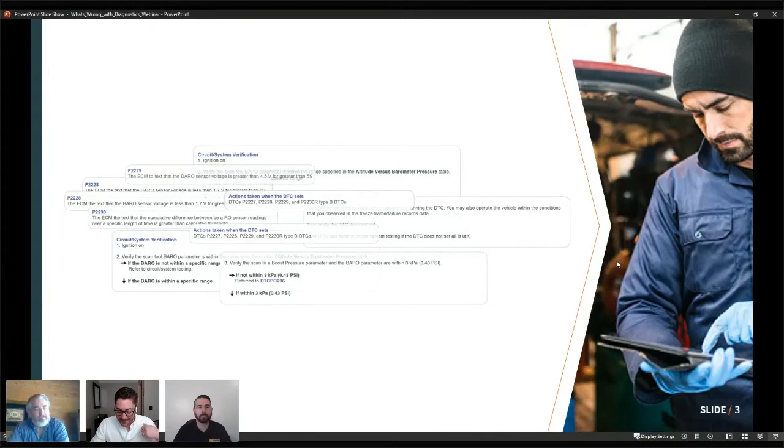Before we dig deep into that, let's delve into how traditional diagnostics have kind of failed you guys in the past. We'll start off with Mike. Do you have any feedback on how traditional diagnostics have failed you in the past?

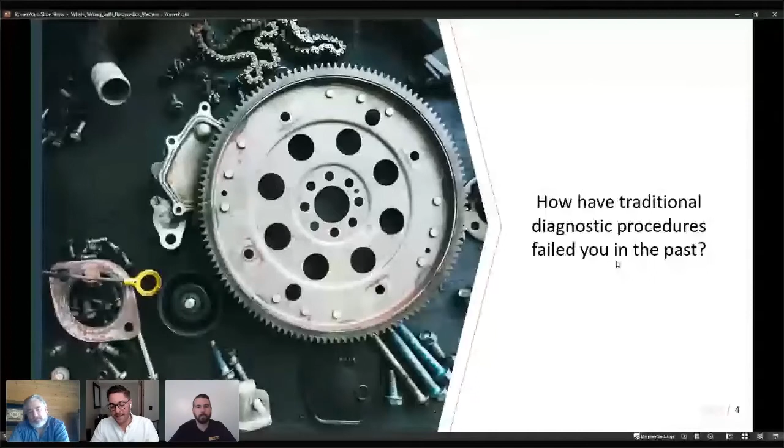Any stories? Yeah, so that's a great question. Traditional diagnostics, when we look at that, it's a terrible term, right? So traditional diagnostics would be the patterns and the processes that we would use 10 years ago to fix an early fuel injection car. And now these vehicles are pretty much driving themselves.

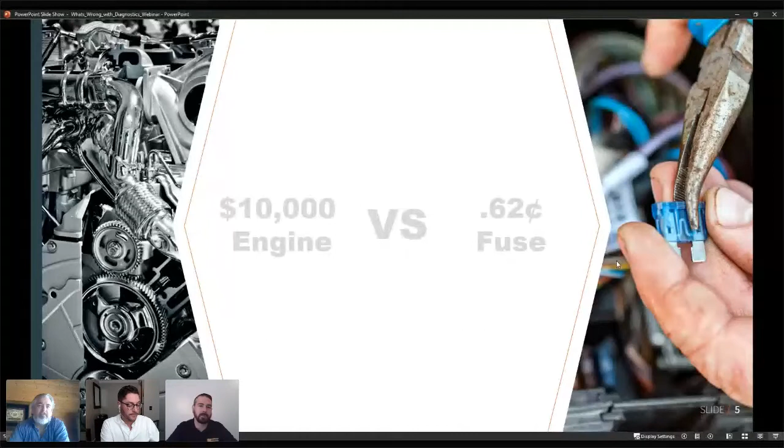The processes for, we look at an ignition switch used to be just a power, and that powered the vehicle on. And now these vehicles are sending communication signals to turn on modules. We have technicians that don't understand how to test the old ignition switch. And these new systems have already been out, they're already on the road, and they're coming into the shops.

So we're so far behind, it's challenging to see how we ever catch up. And the downside of that is you give a technician a trouble tree diagnostic, and half the time that we go through those processes, something's going to be wrong. That trouble tree is just not going to catch it, because the trouble tree wasn't written for a vehicle that's been on the road for 5 or 10 years.

So technicians are intimidated by that. They know that they're not going to be successful that way. And then they're also intimidated by the diagnostics themselves.

I recently heard a story, this wasn't one of my vehicles, but it was a high-end Euro car that a shop had. They couldn't get the engine started and thought the motor was locked up. They ended up putting a motor in this car, which could have probably easily been a $10,000 job. And all that was wrong with it was a fuse that was blown.

That's a standard in our industry right now. As technicians, I have a jar of fuses that I keep in all of our trucks. And when that jar gets full enough to fill a pickle jar, we're going to do some sort of raffle to point out the fact that technicians can't diagnose fuses half the time. They don't understand electrical theory. And that's a huge issue in our industry right now.

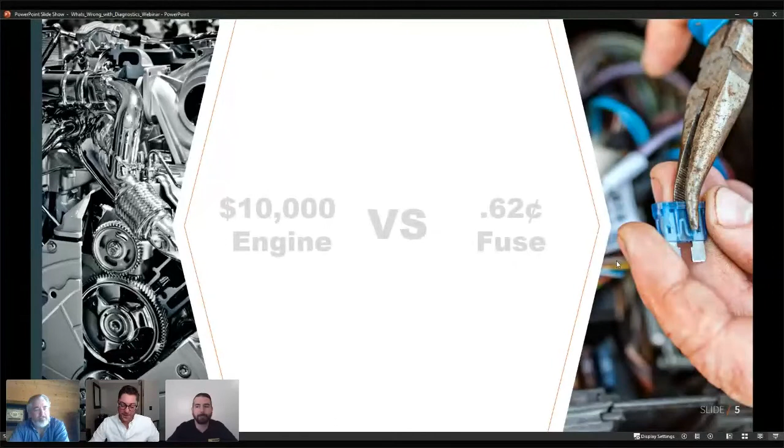Yeah, that's a great question, Nick. So my history going back to OBD1 and seeing the evolution of diagnostics gives me a unique perspective, because one of the jobs I had was authoring service manuals and interacting with the engineering community. And it was amazing to me to see an electrical or mechanical engineer who was kind of surprised he was asked to support authoring diagnostics for the field.

At that time, those engineers were responsible for the warranty on their component. So the story I have is I was witness to an engineer writing the FMEA diagnostics, the failure effects mode analysis, for his specific PCM, a powertrain control module, back in the early 90s, where he wrote 47 pages of pinpoint tests and trouble trees to rule out every other possible cause before he would lead the technician to replace the unit.

He thought that was the best way to control his warranty. In the end, technicians got paid to follow that very lengthy stream, and it may not have been the right thing for his warranty dollars. It definitely was not the right thing for the technician. So that's where I saw things go awry, people trying to protect their component and rule out everything else, rather than doing a good diagnostic of what happens.

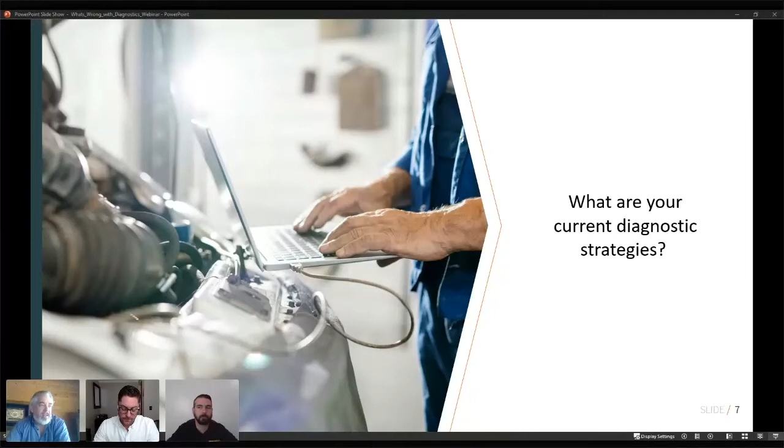You only get one chance to make a first impression, they say, in life, and that's true with customers as well. Once you attempt to repair a vehicle, you've kind of said to the customer, yes, you've got a valid complaint. And if you don't know how it's supposed to work, that can be a real challenge.

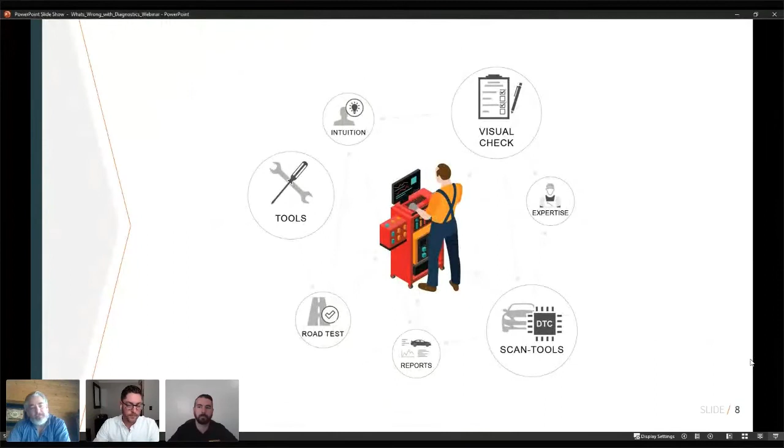That makes perfect sense. And when it comes to that lack of evolution, I always go right to thinking about multi-problem scenarios. Because oftentimes you get a vehicle - or it doesn't have to be a vehicle, this could be anything, even a CNC machine for all we know - with multiple trouble codes and or multiple symptoms. You could go through traditional diagnostic procedures, but it's just very myopic, one by one. So if you don't have the experience to understand and know that these things are interconnected in some way, then you're kind of left on your own, right?

Yeah, absolutely, very true. I use the example - you look at these systems and how everything's integrated. And the big thing that we do a lot of is ADAS systems.

So if the adaptive cruise control doesn't work, that's what the customer is going to bring it in for. We saw one not too long ago where the adaptive cruise control light was obviously on the dash, but it was because of a traction control system issue. We see a lot of glass companies or collision sublet companies that don't know diagnostics run into calibrating these systems - they set everything up, try to calibrate and push the button, and it's not going to work. And it's not going to work not because there's an issue with that radar.

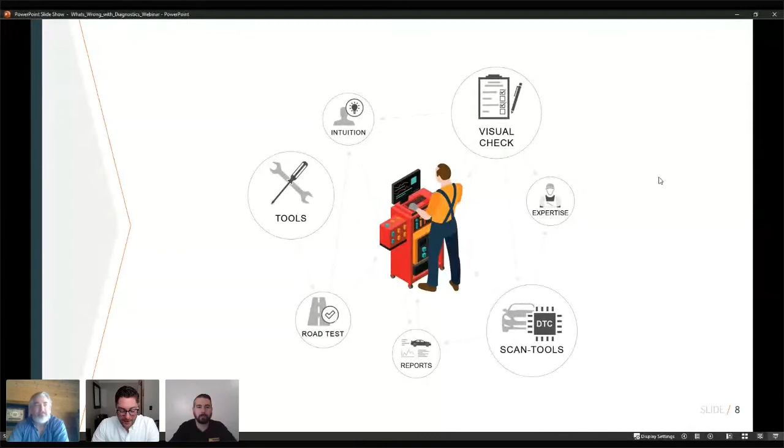That's an interesting one, I'm glad you brought that one up, Mike. So let's move along to our next question here, and we could probably talk for an entire hour just on this. So what are the biggest challenges facing today's technicians?

Well, obviously it's a lack of technicians, and it's a lack of drive for technicians to want to become successful. On the training side, we do a lot of technician training, and we focus on the aftermarket. And I look a lot at how can I be a better leader to these technicians, how can I set a good example of this is where you want to be as a technician.

But generally speaking, when you're working in a repair shop, if you are the diagnostic tech in the standard flat rate system, which still represents most of the industry, you're not going to make as much money as the guy who's doing brake jobs for 3 hours pop, and he's knocking them out in 45 minutes.

And that is slowly starting to change, but unfortunately diagnostics shops have not found a way to make it profitable. I've got 2 GM no-start vehicles for 2 independent repair shops on my schedule this week. I actually had to scramble to fit them in because they're probably going to be easy jobs. And it's sad because these shops don't have technicians that want to learn this stuff, and they don't know how to push those technicians to want to learn it.

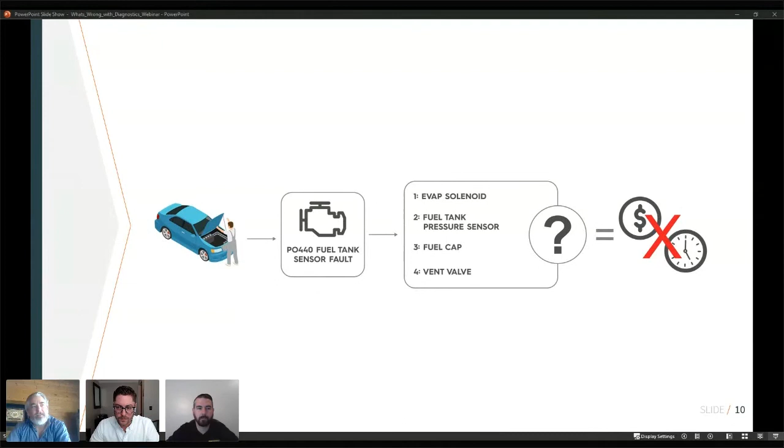Right, all those specific diagnostics — even with right to repair, an independent shop like Mike's doesn't get the benefit of the OEM data because they don't license everything needed in the aftermarket. They're only required to provide information on so much, and they see it as a way to keep the market going to the dealership. There's a reason independent shops are so successful: the delivery, the customer focus, and the pricing differential from going to the dealer.

Mm-hmm. Oh, that makes perfect sense.

Going back to the technician shortage — we had a cultural shift years ago where the focus was really on getting a 4-year degree from a university and getting a desk job. And while all that was occurring, products kept getting more and more complex, and technicians' jobs became harder and harder.

I was just talking to a friend of mine I used to work with, and back in the day, he would have probably 90% of his time actually on a vehicle, hands-on. Today, 90% of that time is spent behind a computer using diagnostic software. So it's just been a huge shift.

I don't think there's a good understanding out there that being a technician, whether automotive or otherwise, can yield an excellent income and some really solid challenges to go through on a daily basis.

So, yeah, Mike, you've been in it a long time. Can you speak to how different it is today than it was 10 years ago to be a tech? Actually, yeah.

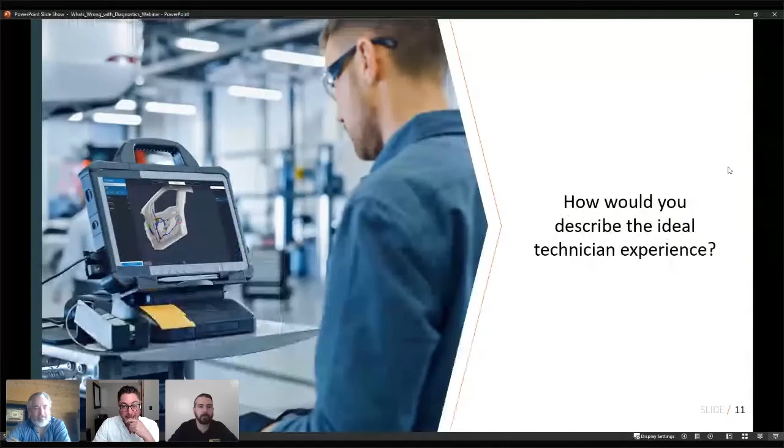So let's move on to our next subject here. Another really loaded question, and I'd like to spend a little bit of time on this one, just kind of playing catch with it. How would you describe the ideal technician experience? Mike, let's start with you.

So actually, if I can answer that, if you go back a couple slides we could touch on that P0440 code, and that'll hopefully help paint the picture. As technicians, to be honest, I don't see as many emissions faults anymore. But as a technician, we get a vehicle pulled into the shop with a P0440 code. What that code means is what it means. I believe 440 isn't necessarily a fuel tank sensor fault, but a general evap fault, meaning there's an issue in the evap system.

It's the first code that sets. Our issue for that vehicle may be a fuel tank sensor fault, but the diagnostic trouble tree, the official trouble tree, is going to take us through testing the evap solenoid, the fuel cap, the fuel tank pressure sensor, and the purge valve. So we go through all of these steps to get through the process, and a lot of that involves smoke testing, which is pretty time-consuming, plus a lot of other checks—getting the vehicle up in the air, putting it down, putting it up, putting it down, looking for smoke.

And then some electrical testing as well. And what some of the aftermarket companies have come through, you look at Identifix and the Snap-on platform with SureTrack, and all their repair link info.

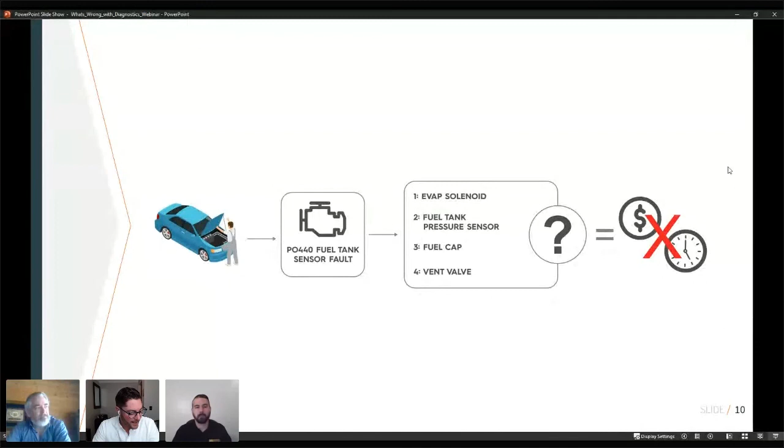And I really like the fact that you use these different tools to lead you to a test and not just a component replacement. Because I know a lot of folks personally will use those types of things, get the highest rated solution based on the problem they plugged in, and just go ahead and replace that component. Yep. So I like that you're using it to lead you to a test and not just a component replacement, so you can actually get a proper diagnosis.

Well, and quite frankly, probably 60 to 75% of the time that works. If you look at the percentages, a lot of these systems, Identifix will almost show you, not in percentage, but it'll show 500 people replace the purge valve, or 1,000 people replace fuel pressure sensor. So you're looking at percentages, and that's probably pretty accurate. But what that does is, for a lot of technicians, why bother doing the testing? Why not take a gamble? 500 people put a purge valve in it, let's give it a shot.

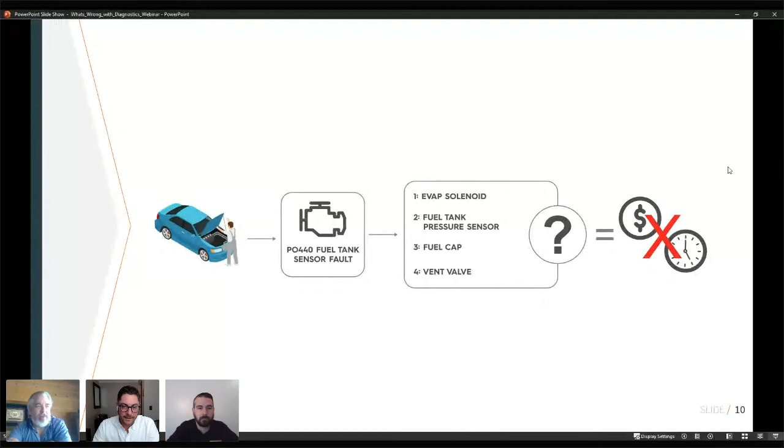They're playing the odds, unfortunately. And how dangerous is that, Ralph, to play the odds like that? Oh, extremely. To Mike's point earlier, you call the customer, you tell them this is what it's going to be. Because you don't have the part in stock, you have to go get it, you put it on, and then you find out you're wrong.

So what's really missing today is taking the old process, since I'm the old guy. I trained six different entry-level technicians when I was a master, and over time imparted my knowledge to them, in the shop, order by order. Today, with the pandemic and even just with mobile repair, what support does an entry-level or newer technician have when he can't go to the stall next to him and ask his colleague or his mentor what he should do with this problem?

So the guided diagnostic solutions coming out really replace the mentorship and have become the force multiplier. Not just like Identifix does today, giving a percentage that you guess, but providing the steps you should do in the proper order. It's machine learning, AI, it learns from past repairs. You get the benefit of what other people have found to be the problem, but you're presented the test so you don't guess and jump to the end game. You perform the test relevant to your vehicle, specific to your VIN, and repair the problem using the tools and data we have from previous repairs, which to me is far more beneficial than just seeing on a scan tool that with this code, 72% of the time, it's this.

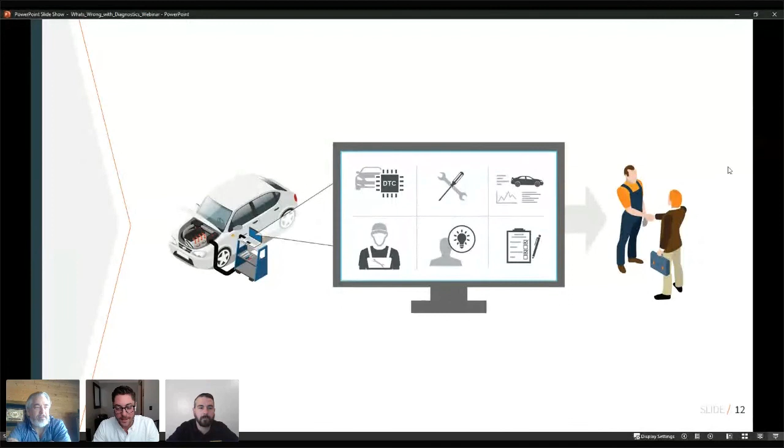Yeah. And let's take that one step further too. If there was a native integration within the scan tool that could pull all of the available values the scan tool has access to into the diagnostic to make it more intelligent, how cool would that be?

That's a great point, because one of the hassles with traditional guided diagnostics is doing all the preliminary checks. When I used to have to get on the phone and call a call center for help just to get authorized for extended diagnostic time, they would ask you to do that checks. And whether you did or not, you told them you did.

And I can say the most difficult problems I've had in my career are always because of a basic issue, something overlooked early or done to the vehicle outside after it was manufactured. I had a driver education car where they installed an extra brake on the passenger side, and that caused a problem intermittently when it pinched the wire harness and the person hit the brake. Trying to diagnose a fault like that, interjected with no rhyme or reason, would definitely have helped to have some guided check of how the system works and where the failure could be.

And Mike, I'm thinking back to your wheel speed sensor example too. How different would it have made the experience for you if you had a diagnostic tool that was natively integrated, pulled the values, but also gave you the ability to explore all the possible causes, tests, and inputs for the situation you were in? I mean, that would be great.

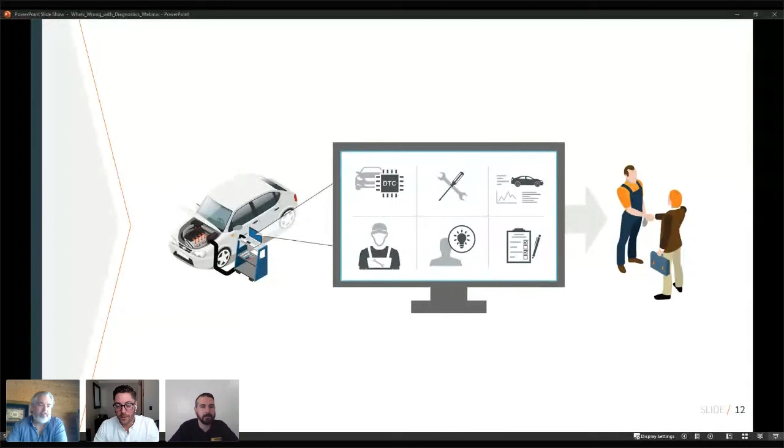Right, yeah, totally, I absolutely agree. So let's go ahead and move to a close here, guys. It's been an awesome discussion, definitely very thought-provoking. I really appreciate you guys lending both of your expertise and coming in on the discussion.